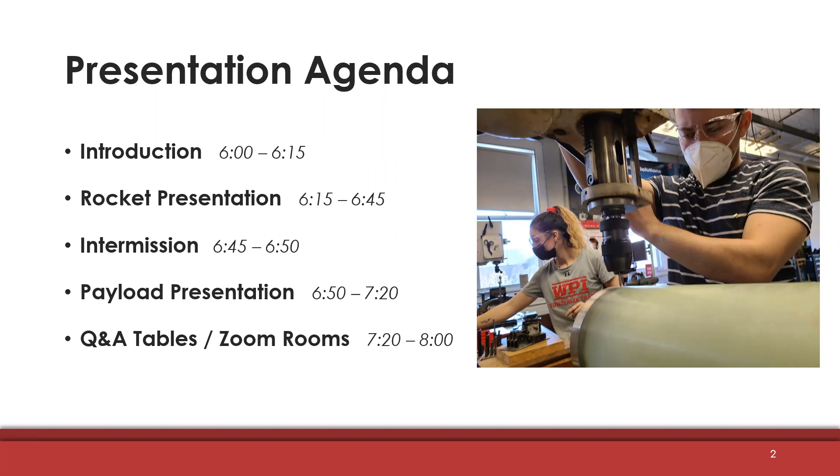Starting off, a little bit about the team overview. So we are a sub-club of the AIAA. We consist of 126 students of all different grades that come together to form two divisions, Rocket and Payload. We'll get more into those a little bit later. The two teams are responsible for different sections of the project, and have 7 sub-teams that make up the two divisions. We'll get more into what each of those are a little later.

We have 16 club officers and sub-team leads. These are the people that manage the logistics, the money, and the safety of the team as a whole throughout the year, and they really make the gears turn for the team as a whole.

A little bit about our team history. We started in 2018, formerly known as the WPI USLI, or University Student Launch Initiative, a competition run by NASA out in Huntsville, Alabama. It had a 5,000 feet target altitude and consisted of about 44 student teams. This competition really focused on technical documentation writing and the design lifecycle, focusing on robotic payloads launched from rockets to solve various challenges each year.

For this year, however, we are part of the Intercollegiate Rocket Engineering Competition, also known as IREC. It's the world's largest intercollegiate rocket competition happening in Spaceport America, New Mexico. In the month of June, we'll head out there with our rocketry advisor, Curtis, and our faculty advisor for that trip, Professor Miller. We'll be launching a rocket over the course of a week and also conversing with many of the other teams there.

Troy. Thank you very much. Go.

Okay, how's it going, everyone? Good evening. My name is Troy Otter, and I'm the Rocket Division Lead for WPI HPRC. As our name suggests, we are responsible for the design and construction of the rocket we will be flying. The Rocket Division is the larger of the two divisions, consisting of about 90 students split among 5 sub-teams.

The mission of the IREC competition is to design and build a rocket that will launch a payload to an altitude of either 10,000 or 30,000 feet and then return to the ground safely. This year, we are participating in the 10K COTS category, which means we will be flying to 10,000 feet using a commercial off-the-shelf solid motor. We are scored based on overall technical prowess of our rocket design and how close we get to our target apogee.

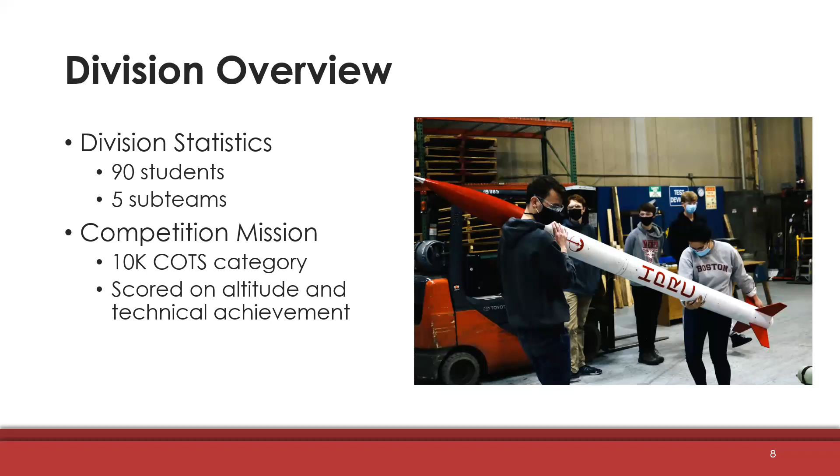I am excited to present the design of our 2022 competition rocket for the Spaceport America Cup. This year's vehicle has a diameter of 6 inches and stands at 11 and a quarter feet tall. Fully loaded on the launch pad, the rocket will weigh 68 pounds, and with a motor producing 500 pounds of thrust, will reach a maximum velocity of over 600 miles an hour.

This vehicle represents a significant step forward in our club's history, integrating multiple advanced new features, including a custom avionics system, a new air brake design, our first large-scale composite components, and a novel recovery system. Tonight, each of our sub-teams are going to take you through the various aspects of their designs, and we're going to begin with the aerostructure sub-team.

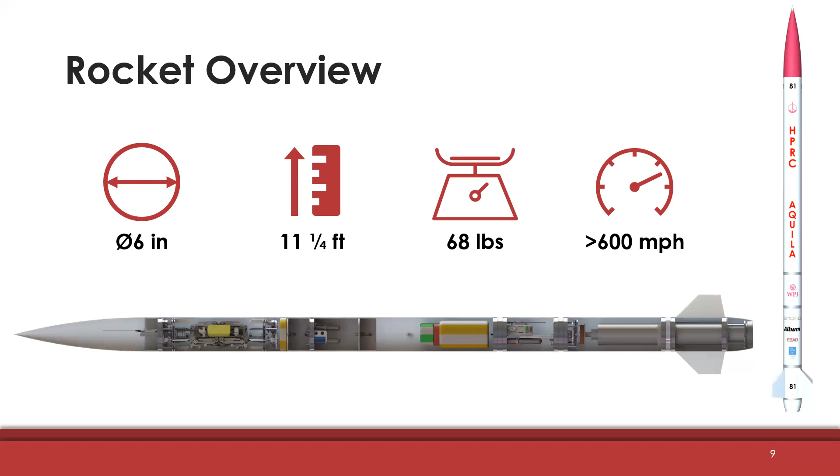Aerostructures is responsible for the outer structure of the rocket. In the picture at the bottom, you can see the different fiberglass sections of the airframe. At the top, we have the nose cone, the upper airframe, middle airframe, the electronics bay, lower airframe, and then at the very bottom, we have our two main components.

Those are the fin can and the tail cone. The fin can helps with stability and keeps the rocket straight during flight. The fins also stay attached to the fin can so that they stay on during flight. The tail cone reduces drag on the bottom of the rocket and also attaches to the motor retention subassembly.

The fin can ensures the fins are straight and thus the rocket is stable in flight. The fin can is also responsible for making sure the fins don't break upon landing. We made it by attaching 4 fins to the body with structural epoxy fillets and ensured its strength with 4 tip-to-tip fiberglass layups, stretching from one end of the fin to the next. We chose fiberglass layups and using a fin jig over fin slots because of its low weight and high strength.

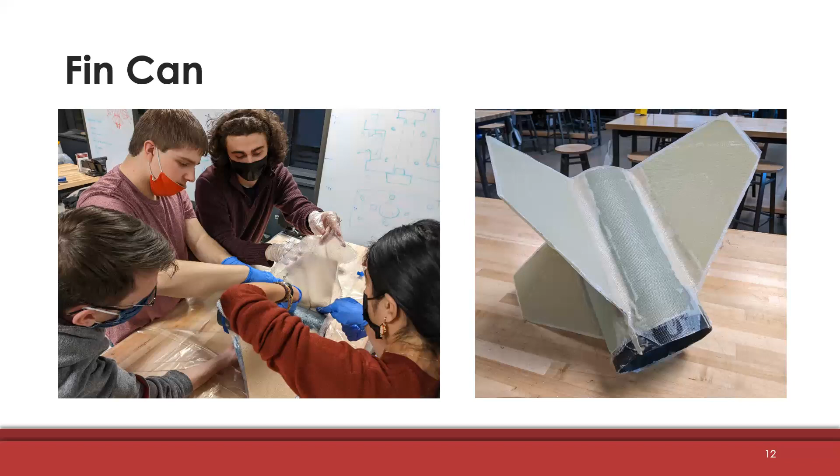The fin can ensures the fins are straight and thus the rocket's stability in flight. The fin can is also responsible for making sure the fins don't move.

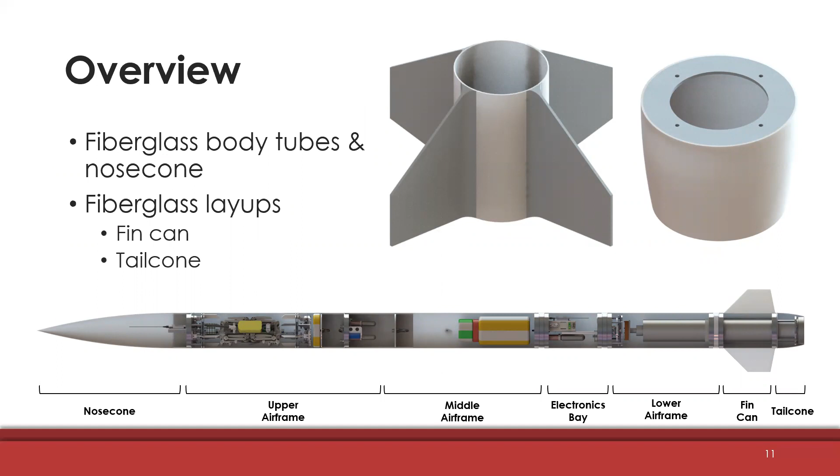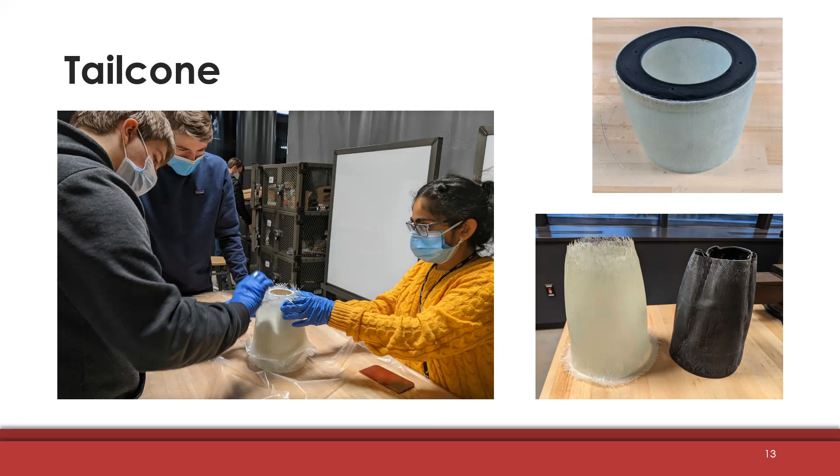The tail cone reduces drag around the end of the rocket and holds the motor casing. We constructed it in 3 steps. First, the mold was 3D printed, which you can see in the bottom right, and the fiberglass sleeves were laid around the mold. In the top right, you can see the final product and the bulkhead, which is used to attach to the motor casing. Similar to the fin can, we made it with strength and weight in mind. Using fiberglass afforded us the low weight, while laying around the mold gave us the strength we desired.

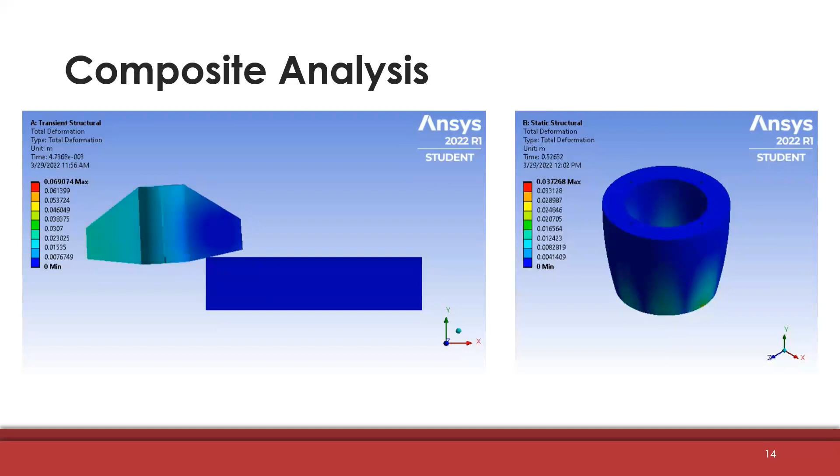To make sure our materials can withstand the forces they face during launch and landing, we ran a series of tests using ANSYS. For the fin can, on the left, we did mostly transient structural analysis, simulating an impact force on the ground, specifically if the fin can were to land on a rock. For the tail cone, we did more static structural analysis, simulating a constant force during landing. In the coming weeks, we plan on doing more physical tests of our composites to make sure the expected results match our simulated results from ANSYS.

And next up, we have couplings.

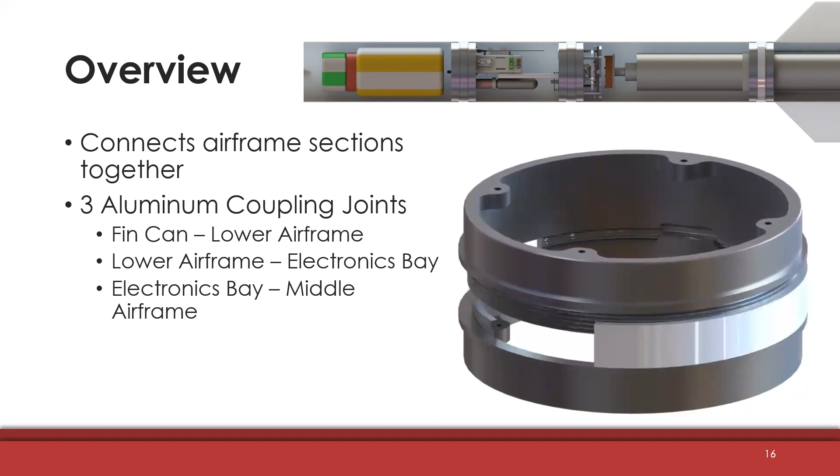The coupling subteam is responsible for rigidly connecting different sections of the rocket airframe together. This year, we decided to connect the fin can and lower airframe, the lower airframe with the electronics bay, and lastly, the electronics bay with the middle airframe. On the right, we have an animation of the couplings assembling and disassembling.

A traditional rocket airframe joint is made up of a short coupler tube that extends into the airframe on either side of the joint and keeps the section stiff. The tube itself and any internal components are held in place with bolts going through the airframe. The downside of this design is that it's difficult to manufacture and assemble, as lining up the small bolts can be a challenge. You also have to include features in your parts for these bolts to thread into, which can increase manufacturing complexity.

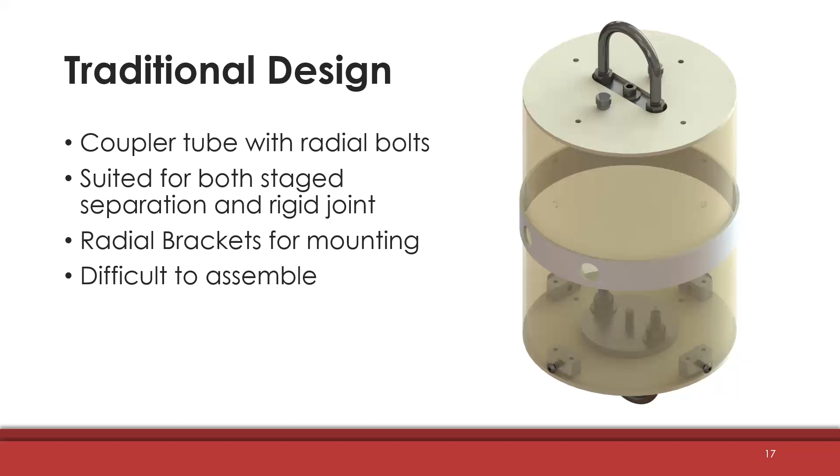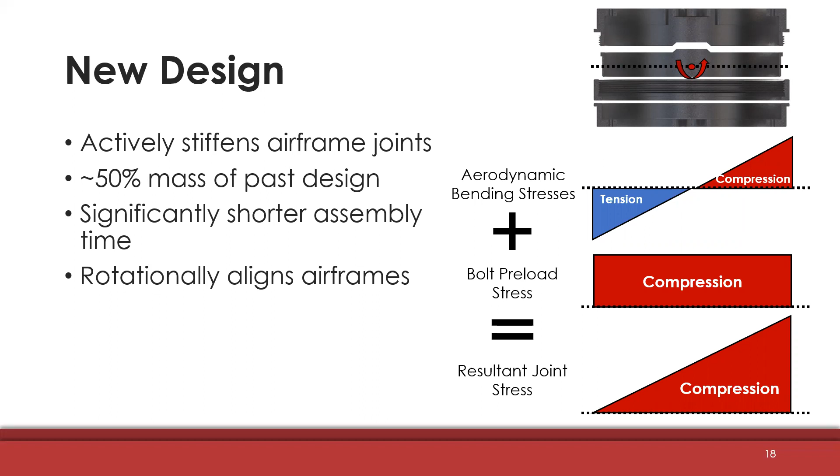Our new coupling design is stiffer, lighter, easier to assemble, and completely standardized across the airframe. The preload derived from our threaded connection helps cancel out the tensile stresses due to lateral loads, so the resultant load on the airframe joints is only compressive. This means the joints are not pulled apart during flight and the vehicle remains stiff. The couplings are also significantly lighter than a coupler tube and take up less space in the airframe. They also feature integrated mounting flanges to make attaching components to them easier than to the coupling tube.

And to verify that our couplings were strong enough, we performed a series of structural simulations in ANSYS to refine our design. Once we had an actual physical prototype, we conducted a real-world flexural test at the worst-case flight loads. These tests allowed us to gain more confidence in the novel design and let us move forward with implementing it into the final rocket.

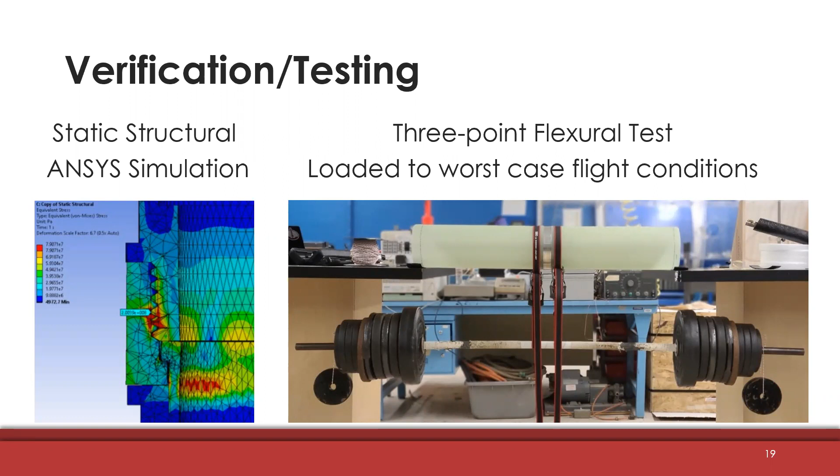Our motor retention system was designed to transfer thrust from the motor to our airframe via thrust coupling and securely hold the motor casing inside the rocket throughout flight. We performed several static simulations on the buckling failure mode of our standoffs and yielding of our thrust coupling.

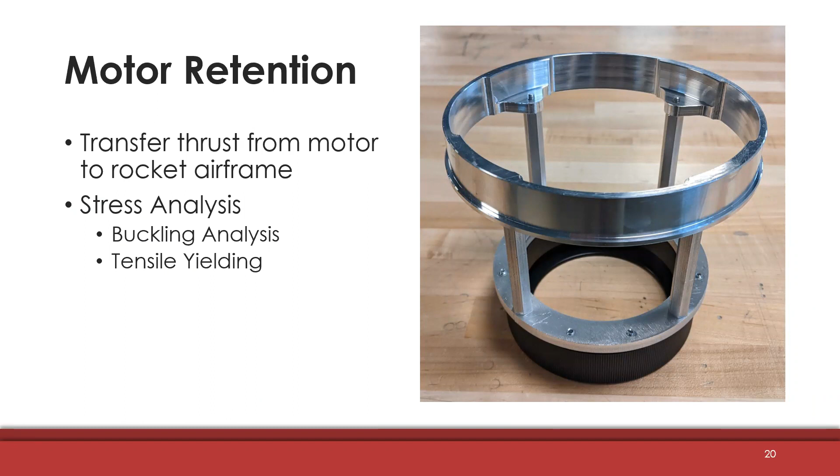Our team spent several weeks in the machine shop manufacturing 3 coupling joints and our motor retention system. Prior to this, we optimized machining processes by cutting threads on smaller test pieces to ensure we get high quality threads on our final product. We also designed several work holding fixtures to allow us to machine our parts more efficiently.

With an overview of the couplings completed, we will now move on to our recovery system.

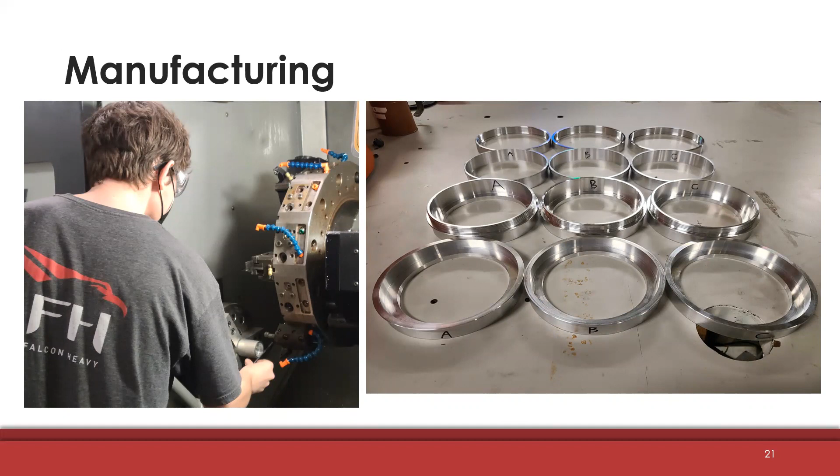The recovery sub-team is responsible for the design of the parachute system used to return the rocket to the ground safely. The vehicle uses 2 parachutes, a drogue parachute deployed at apogee to stabilize the descent of the vehicle, and a main parachute deployed at 1,500 feet above ground, used to slow the vehicle down to a safe velocity for landing. Traditionally, high-power rockets store each of these parachutes in different sections of the vehicle, and the airframe separates in 2 or more locations using black powder charges to release them.

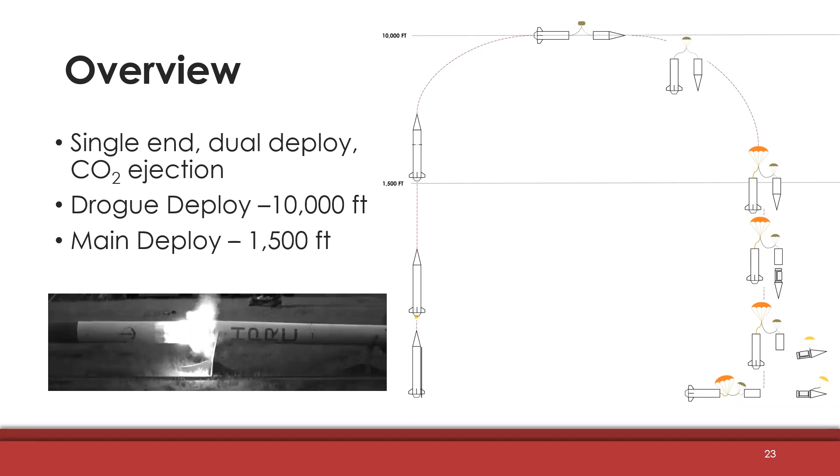This year, the recovery team took on 2 new challenges, the first being that the separation of the airframe is accomplished through the use of a CO2 system rather than the traditional black powder, reducing the need for energetics on the vehicle and the added bonus of reliability that CO2 provides at higher altitudes. Second, the vehicle has 1 separation point, reducing mechanical complexity and the space taken up by the recovery system.

In order to perform these tasks desired for the system, the team had to create a more intricate line system than the traditional. At our first deployment at apogee, the CO2 system will separate the upper and middle airframes. The separation of these airframes pulls the drogue parachute out, while the main parachute is secured inside the middle airframe in a bag by a hair tie.

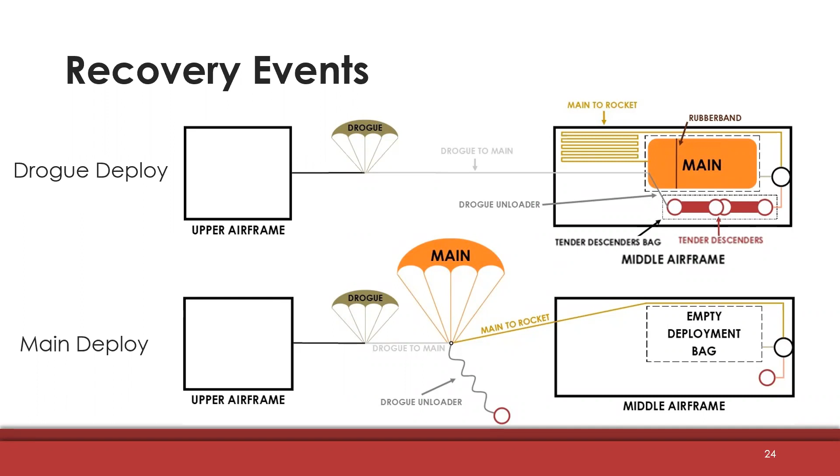At this point, the drogue parachute line pulls on the drogue unloader, which is attached to the vehicle through the redundant tender descenders. Tender descenders are a pyrotechnic release, and at the main deployment, each tender descender has a small black powder charge in it that ignites and separates the connected shock cord. This allows the drogue line to pull the main parachute out of the bag and unfurl to safely land the rocket.

The primary function of the recovery bay is to house the altimeters and the ejection system hardware. Other functions are to serve as an attachment point for our parachutes and to protect the recovery bay from ejection gases. The bulkhead plate is made from aluminum, so it can also withstand the forces of the parachutes pulling on the eye nut coming out the top.

All of our electronics are mounted on what we call a sled. The sled is 3D printed from polycarbonate, so it can withstand the extreme temperatures the rocket faces on the launch pad and at apogee. We decided the shape of the sled should be a half hexagon so we can optimize the amount of surface area we have to mount electronics while still fitting the CO2 ejection system behind it.

We have 2 ejection systems on the rocket. One consists of our primary altimeter and a CO2 ejection system, and the other is the backup altimeter with the same CO2 ejection system. The primary system fires at apogee and then at the second event at 1,500 feet, and the backup system will fire 2 seconds after to ensure the parachutes get out of the rocket.

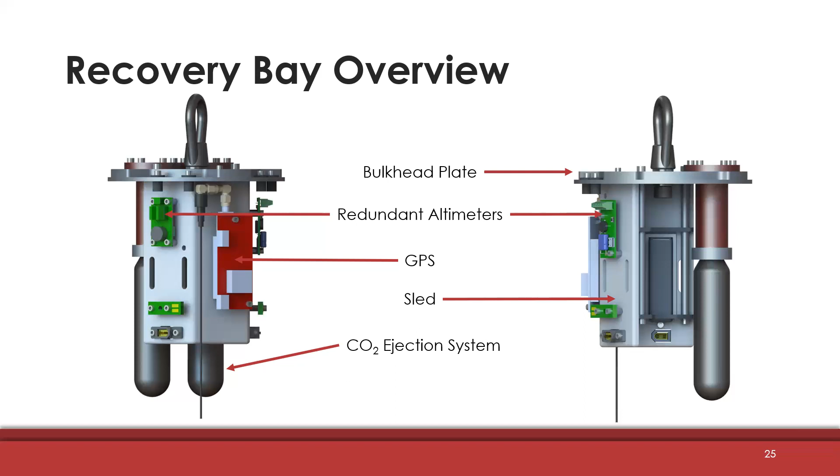In the recovery bay, we were trying to fit everything in as little space as possible. We started making the recovery bay by creating a prototype so we could lay out all the electronics and CO2 ejection systems to make sure it all fits as intended and everything is accessible. From there, the team routed wires to make sure this layout was possible.

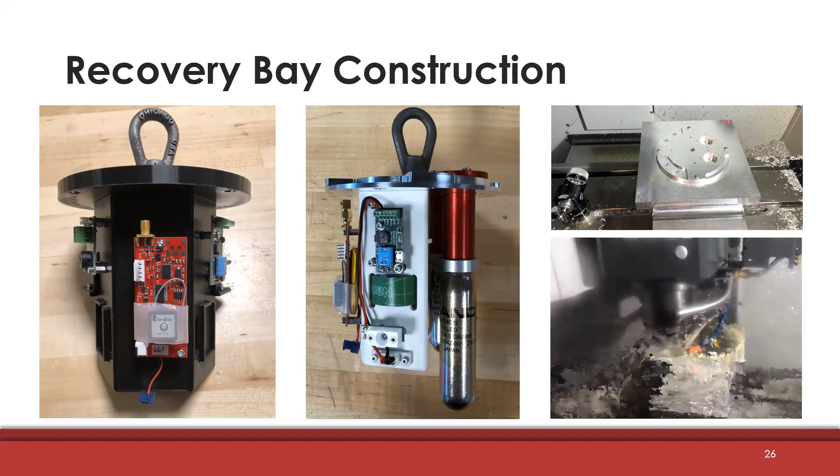After making the appropriate changes, we used a CNC mill to make the bulkhead plate, and the sled was 3D printed. Multiple copies of this plate are being made so team members can learn how to go from CAD to CAM and then machine a final product.

The recovery system is one of the most critical systems on the rocket, so every aspect has to be tested so the rocket lands correctly. Our first test this year was a CO2 ejection test to determine what size CO2 canister is needed to separate the airframe from the nose cone.

We tested several different sizes to determine this. Since this year we're keeping the main in a bag, we needed to see if the drogue has enough drag to pull the main out of the bag. We did this by doing two drop tests. One was tethered to a tree and the other was throwing a test stand off a parking garage to make sure the main parachute will come out of the bag.

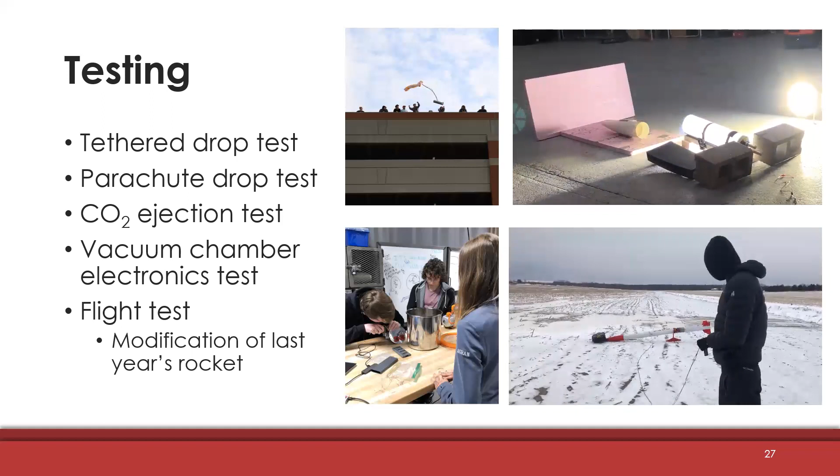To verify our altimeters are working, we use a vacuum chamber to set the pressure to apogee and then main, to make sure the altimeters fire their charges correctly. Lastly, this weekend we plan on flying our new single end deployment system in last year's rocket to make sure it works. And next we'll hear from the air brake sub-team.

The goal of the rocket this year is to reach a target apogee of 10,000 feet. To help us reach that goal, we have implemented a system of air brakes. The air brakes' job is to deploy a set of fins that help increase the amount of drag that the rocket feels, and as a result will slow down the rocket enough to help us reach the target apogee.

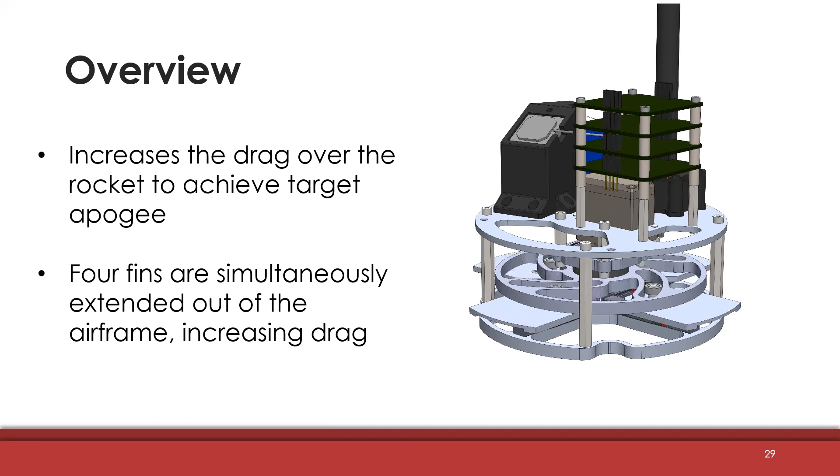In our initial design, we wanted to limit the amount of friction and binding that the air brakes would feel. So some initial designs we looked into were a rack and pinion, and even fins that would deploy by rotating in the outer airframe of the rocket. However, we ultimately decided to go with a linear rail system, as it provided the most stability and was more consistent than the other models.

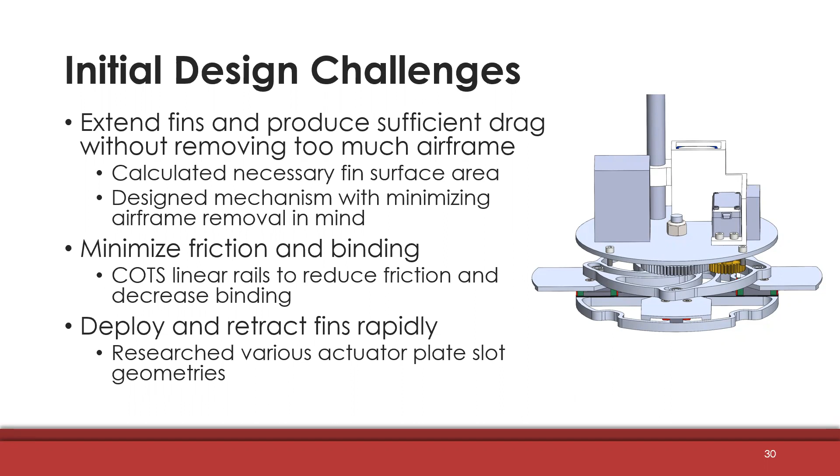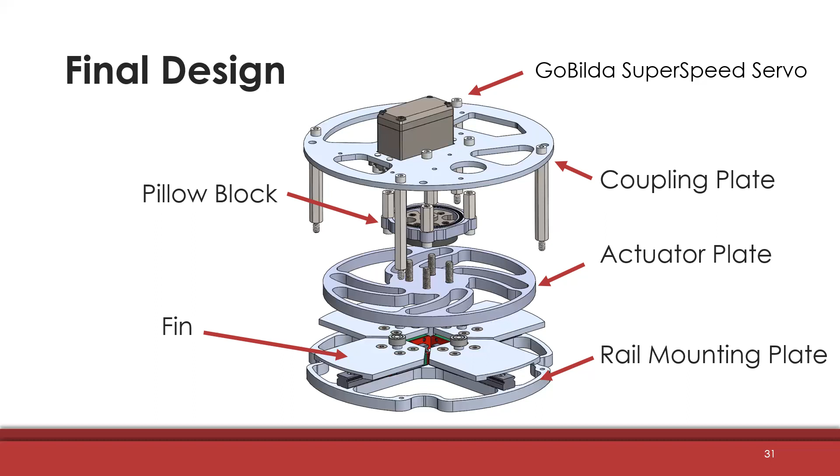Next step in our process was to verify our designs. To verify that the air brakes would be capable of effectively controlling the apogee of the vehicle, we began simulating a normal flight using OpenRocket, an open source software. From this trajectory, we selected a series of points representative of the full range of dynamic pressures the rocket would experience during flight.

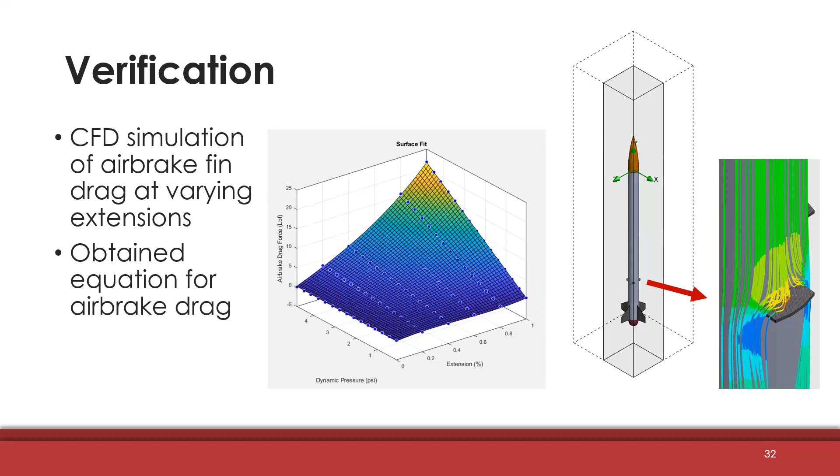With this data in mind, we then moved on to prototyping. The creation of the prototype was essential to confirming that our design would work the way we intended, and that the air brakes would properly deploy as they're critical to reaching that 10,000 foot apogee.

From our prototype, we were able to verify that the linear rails would provide reliable actuation with low friction and that we would be able to avoid binding. The prototype also proved that the fins were moving with each other at the same time. This was important to reduce the risk of aerodynamic moments causing the trajectory of the rocket to fluctuate and destabilize. Lastly, this test proved that the air brakes were structurally sound and restricted any unintentional motion in the system.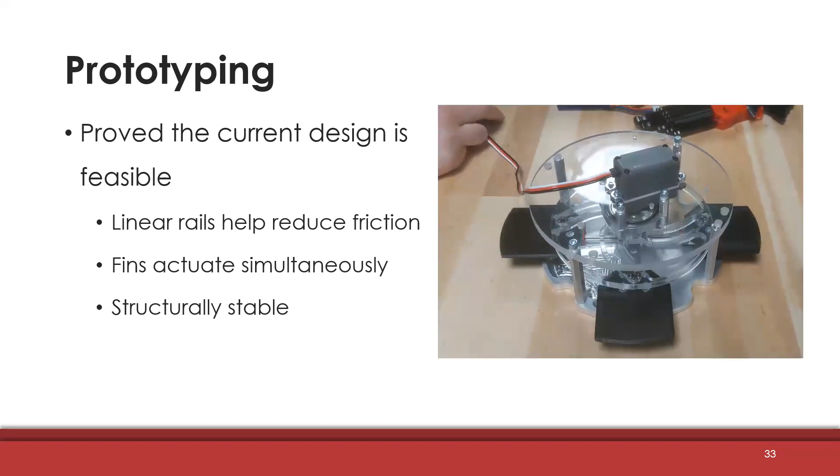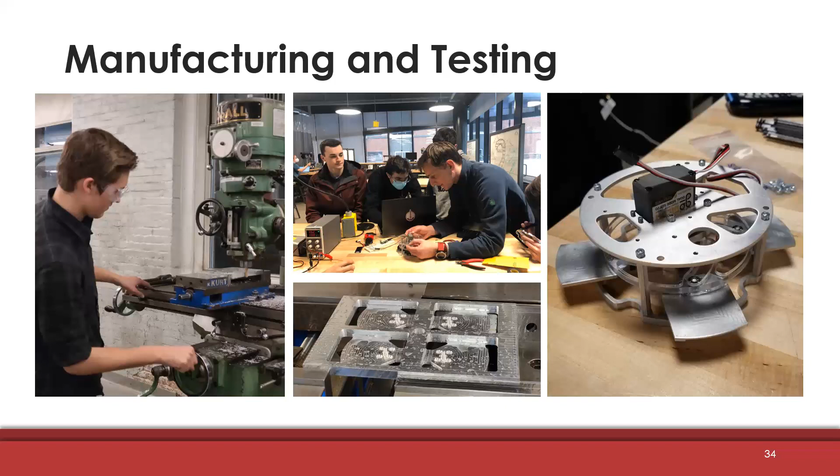After having proved our air brakes design through prototyping, we moved on to manufacturing. During this last C term, our sub-team began manufacturing in the shops here at Washburn. Most of the components were machined in-house by our students out of aluminum. Most of the operations were completed on CNC mills, ensuring the parts were made accurately and within our tolerances, making them suitable for our purpose.

Hello, I'm Cameron, interim payload lead for HPRC. This year's payload will deploy a quadcopter drone to complete its mission of autonomously locating the rocket using a directional antenna tuned to the frequency of the rocket's telemetry transmission. The payload will be deployed from the rocket once it's falling under parachute, and will deploy a quadcopter once safely reaching the ground.

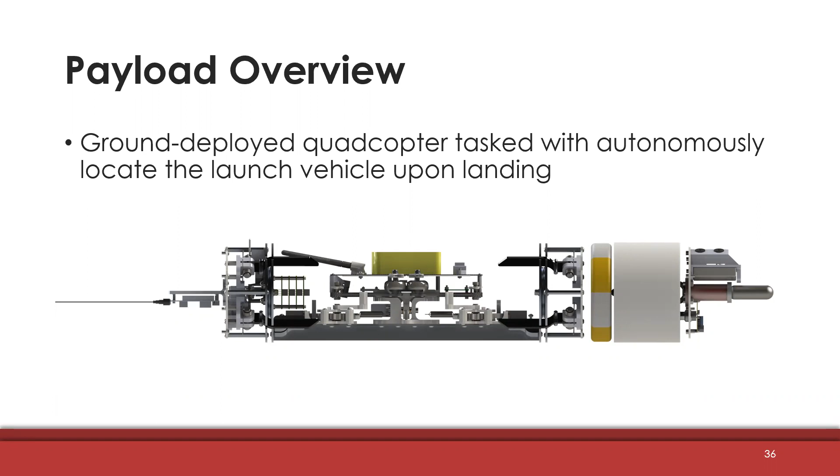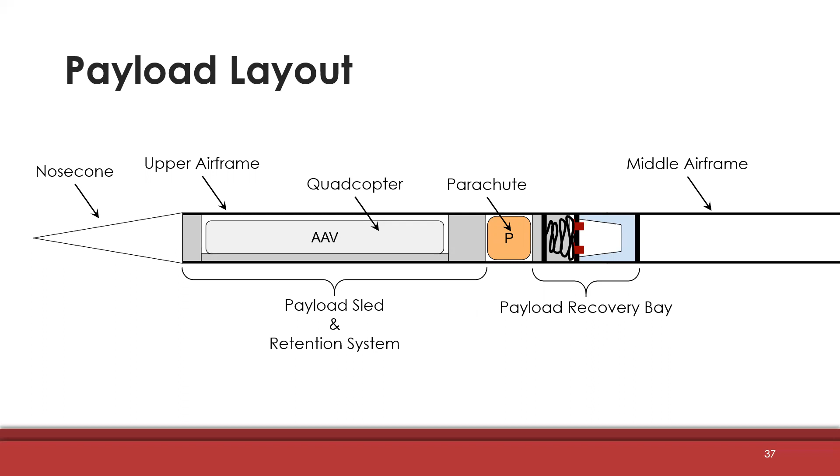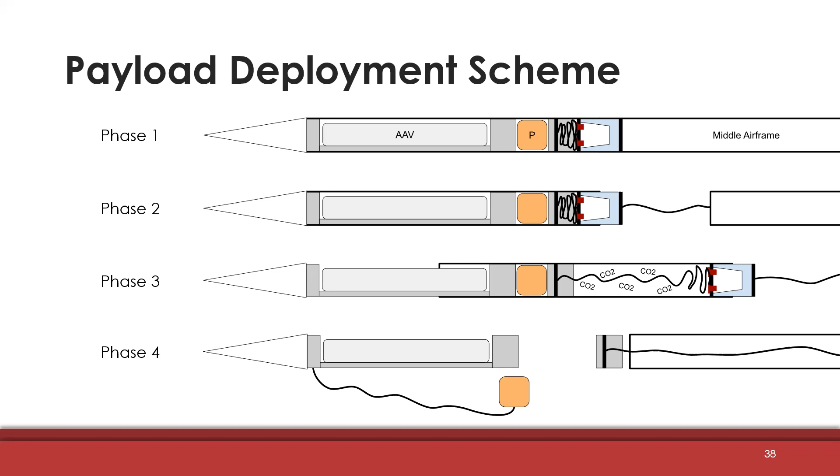So this is the deployment scheme of the payload. After the rocket splits and the upper airframe is ejected from the rocket, as seen in phase 2, at around 1,400 feet the payload's CO2 system is activated, pushing the payload out. This is just after the main parachute deploys on the rocket. When the payload CO2 system is activated, it pushes the payload out of the upper airframe, allowing the payload to deploy and allowing the payload's parachute to open up and descend.

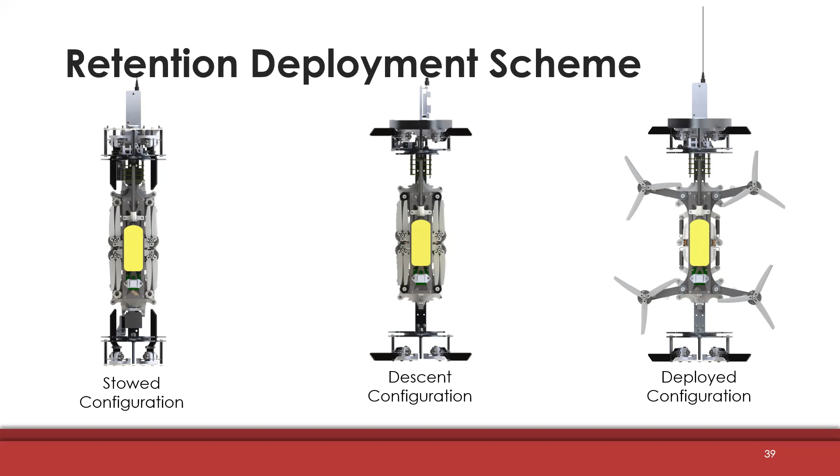Next, we have our payload mechanical division.

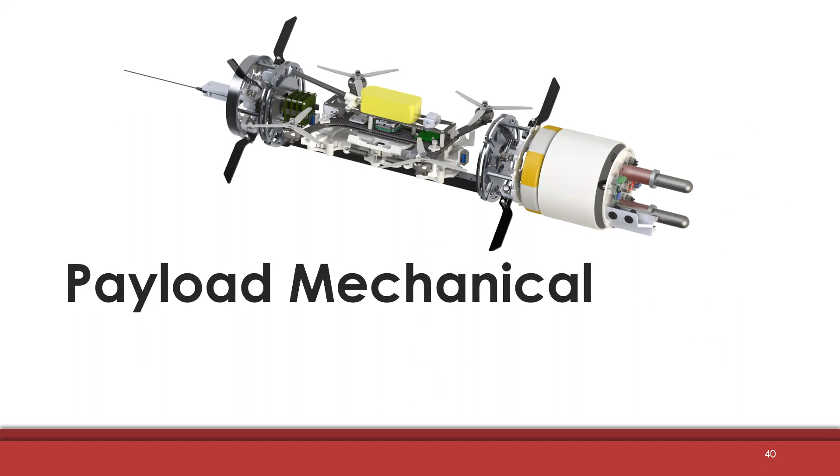Hello, this is the mechanical portion of the payload, and there are two major systems: the retention system and the quadcopter. First, the retention system. The payload's retention system is responsible for retaining the quadcopter from ascent to landing, providing a stable platform for the quadcopter, along with deploying its arms and releasing it for flight.

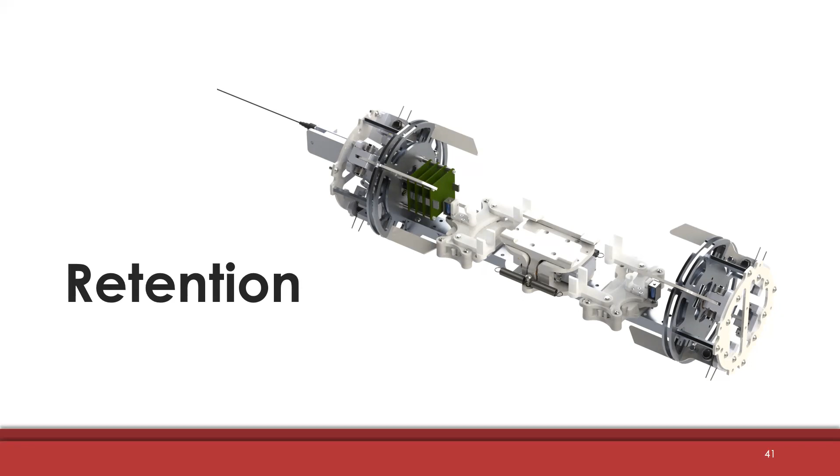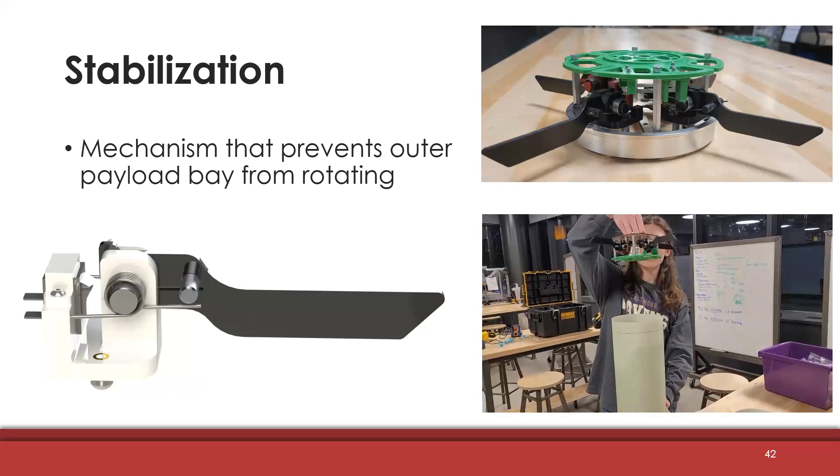The first part of the retention system is the stabilization system. These stabilization pedals deploy when the payload comes out of the upper airframe, and it prevents the payload's bay from rotating mid-flight. They are deployed using spring power, and as you can see in the video, they come out very well.

The second part of the retention system is the aforementioned rotation part. This mechanism is used to ensure proper deployment of the quadcopter, the sled, and the interior of the payload, and must be rotated once we're on the ground so that the quadcopter is parallel to the ground. To do this, we designed a mechanism powered by a servo that rotates the sled, as shown in the diagram. We have a rotating bulkhead with a thrust bearing in between to reduce friction and make it slide as smoothly as possible. A shaft passes through these two bulkheads and is bolted on either side to make sure there's no slip in the thrust bearing, and there's a D shaft on the rotating bulkhead so that it can actually rotate.

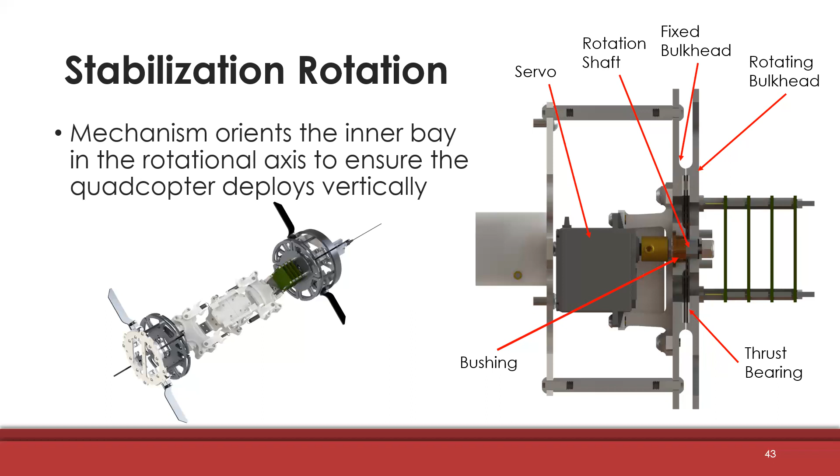And next is the parachute release mechanism. Once we're on the ground, we don't really want the payload running away from us in high winds. So we have to cut the payload,

cut the parachute. To do this, we're using a servo that has a spring counteracting it. The spring is used to ensure that if the servo loses power at any point, the pin stays closed and our payload does not drop from the sky. We used a SolidWorks simulation to make sure that this pin and the pin mounting mechanism has enough strength to

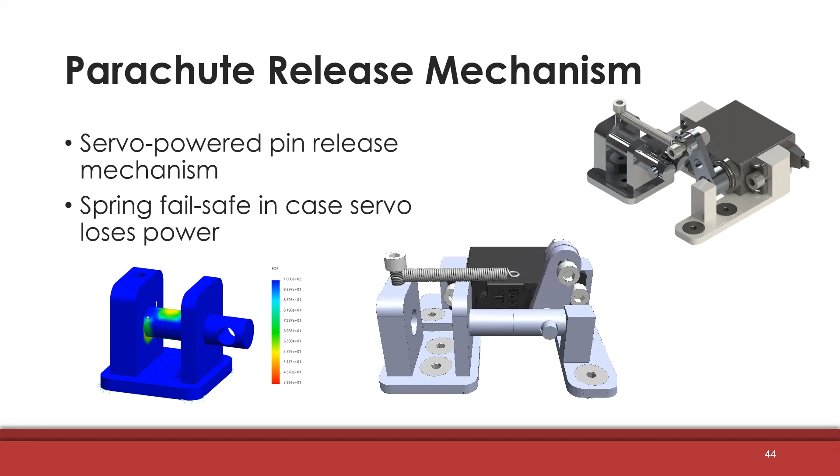keep it from failing under opening load. Once we get to the ground, we're self-righted and we've released the parachute, we have to start deploying the quadcopter. The first step of this is the quad deployment, the arm deployments.

We're using a rack and pinion held back by a servo. We're using a rack and pinion because it was an elegant way to keep a low profile and reduce weight. The system is locked with a servo, as you can see in the back, and when we are in visual confirmation and visual sight of the quad, we let the servo know that it's all right to open up, and springs pull the middle rack forward, releasing the arms of the quadcopter, as you'll see later

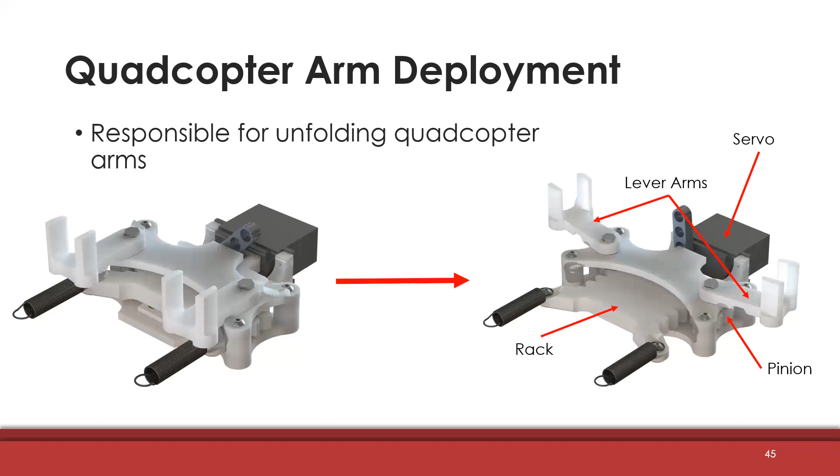on. The last part, and arguably the most important part of the retention system, is a quadcopter gripper. This quadcopter gripper holds around the quadcopter the whole duration of the flight. And it uses 4 gears powered by a servo, and it drives the arms outward and inward with gears.

Once visual confirmation is made from the payload and the arms are unfolded correctly, we let go of the quadcopter for the quadcopter to finish the mission.

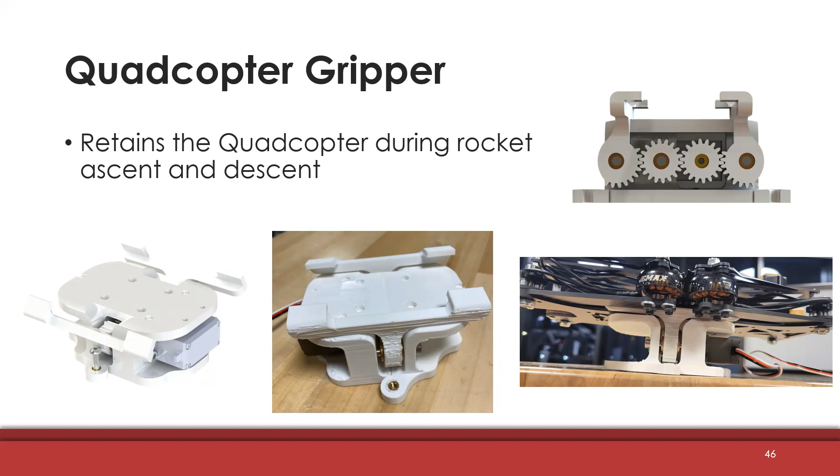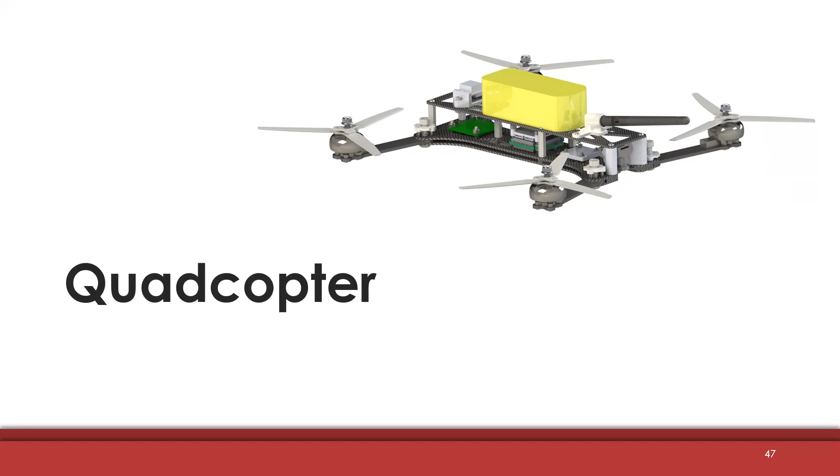All right. So on to the quadcopter. The quadcopter is a portion of the payload that is responsible for autonomously locating the launch vehicle upon landing. So moving into the structure for the quadcopter, in order to ensure a quadcopter can complete this mission in the largest range of possible wind conditions, we designed an unfolding quadcopter with a large overall frame and propeller size, which also takes up less space and room inside of the rocket when stowed.

This design features an H-frame with arms that fold alongside the body and unfold and lock into place once we reach that configuration. The main body of our quadcopter is constructed from a sandwich of carbon fiber plates to provide strength and rigidity to the frame.

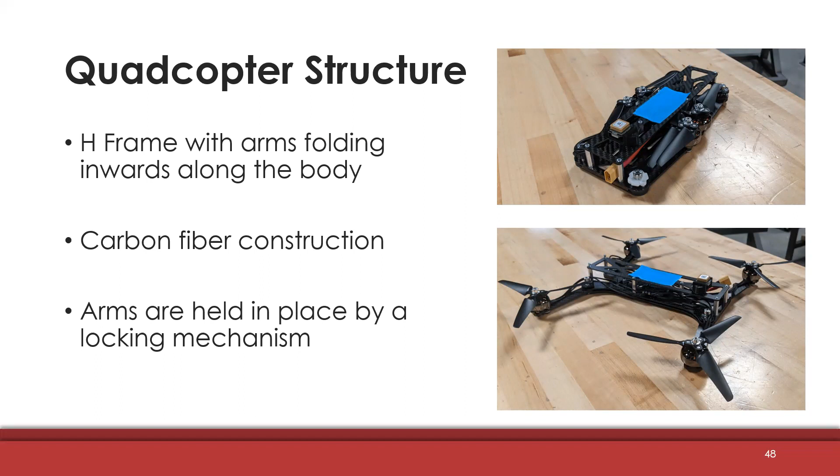We also designed a quadcopter arm locking mechanism. To ensure our quadcopter's arms are positively locked into place once unfolded, a spring-actuated pin locking mechanism was designed. This design is a result of iteration on a previous year's design. A shoulder bolt is used as the main structure and motion guide to ensure smooth and precise actuation.

Once the arms are unfolded, a spring pushes a 3D printed pin carrier, which has 3 machined aluminum pins, into place. These pins locate into holes in the quadcopter's frame, as well as the quadcopter arms, which prevent them from rotating during flight.

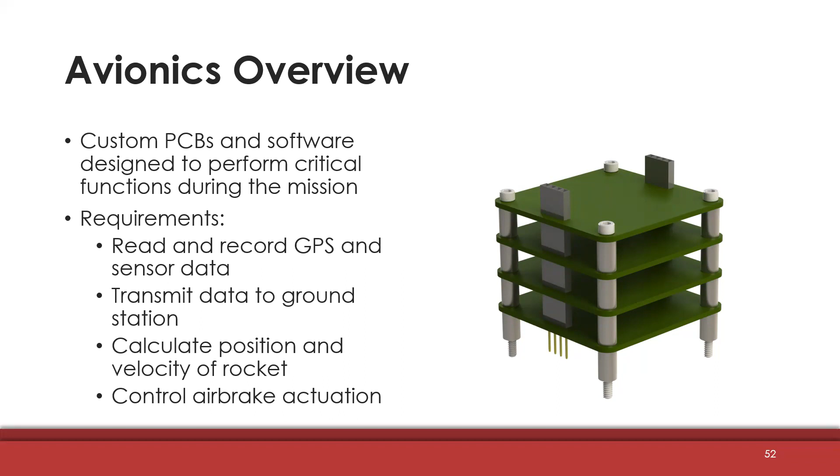Okay, so moving on to the avionics system of the rocket. The avionics system consists of 4 custom designed PCBs, as well as software to perform critical missions during our flight. Our main requirements were to read and record GPS and sensor data, transmit that data to the ground station, calculate the position and velocity of the rocket, and control the air brake actuation to reach our target apogee.

The avionics system is comprised of 4 separate PCBs that are arranged in a stack. We have the controller board, which houses our main processor and handles calculations for the control of the air brakes. The sensor board houses a number of sensors for gathering data on the rocket's position.

The telemetry board records the sensor data as well as transmitting it to the ground station. And finally, the power board is tasked with regulating the battery voltage to be used by the other boards. And it also controls the servo and separation charges.

All these PCBs were created using Altium Designer, and the system is designed to be modular, so you can easily swap out boards if there's a problem, and it was an easy way to divide up the design work.

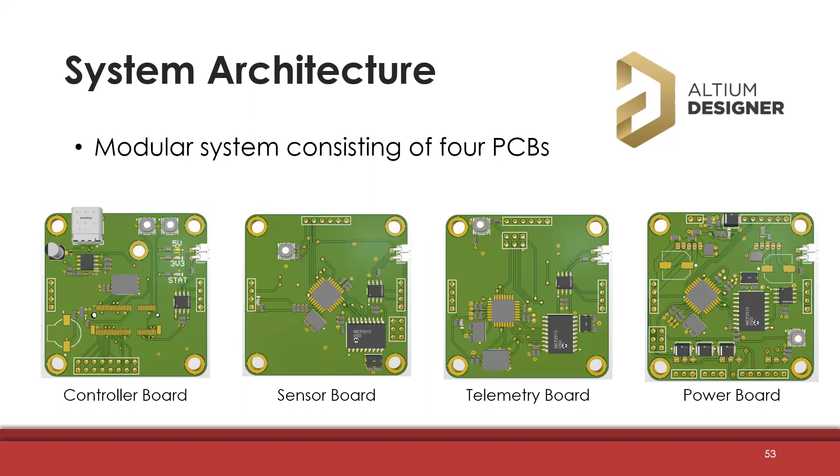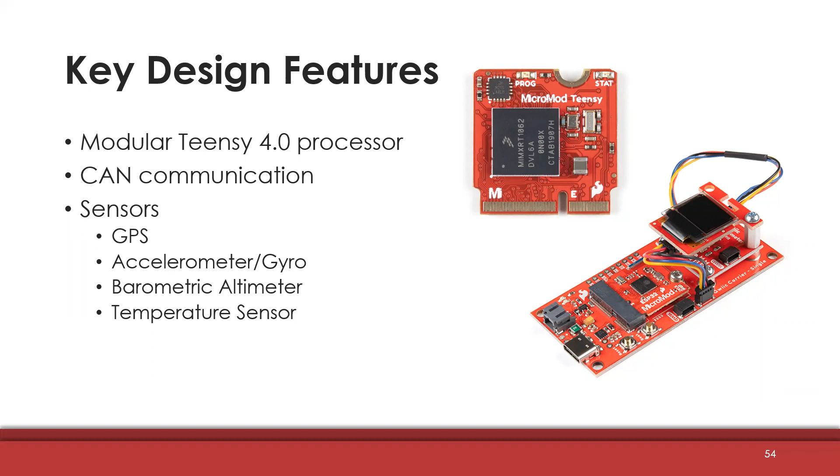Some key features of our design include the usage of a Teensy microcontroller, which functions similar to an Arduino, but is much more powerful than a standard Arduino. The boards are connected with CAN communication protocol, which is resistant to noise and enables us to connect as many boards as we need. The main sensors we are using include a GPS, an accelerometer, an altimeter, and a temperature sensor.

Moving on to the ground station. The main purpose of the ground station is to allow the team to be in the loop with exactly what's happening with the rocket as it progresses through its flight. To achieve this, we have written custom software to receive and display the telemetry coming from the rocket. The radio receiving the data will be connected to a Raspberry Pi microcomputer, which will host its own Wi-Fi network, so the computers running the ground station software can connect and pull data from the rocket.

The ground station team has also been simulating, developing, analyzing, and testing custom antennas suited specifically for long-range and high-altitude communications. On the left is a receiving antenna we designed, tuned, and simulated using MATLAB, proving effective at our target frequency of 915 megahertz, as seen in the graph of magnitude versus frequency. The higher the magnitude of the gain at a given frequency, the better it is at that frequency.

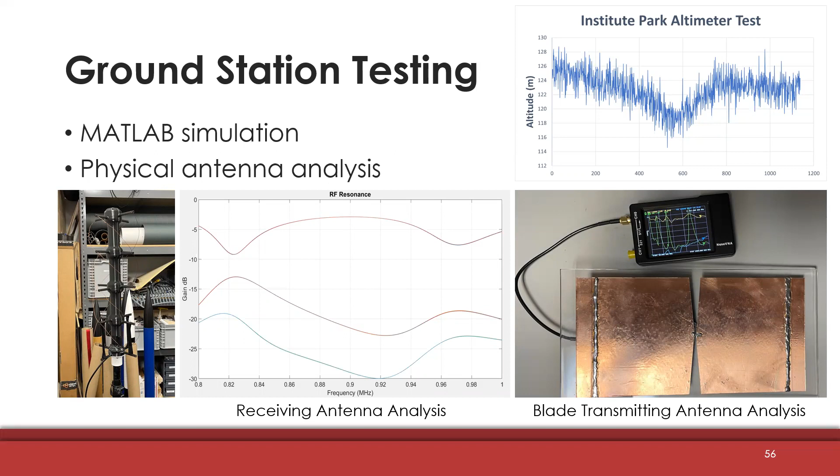In the Institute Park altimeter test plot, you can see the results of a test we performed across the street in Institute Park, transmitting to the ground station from 580 meters away as we walked up and down a hill, which was logged by the ground station and later analyzed and put into this plot.

Here is the most recent version of the ground station with its full functionality. All relevant information pertaining to the rocket during ascent, descent, and after touchdown can be viewed here and logged to a file on the user's desktop or wherever they specify.

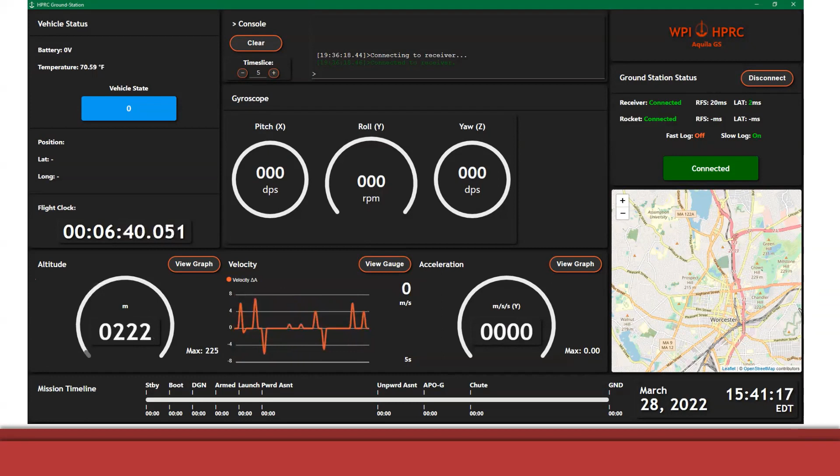What you can see here is a video of the ground station during a test transmission with only the barometer hooked up to the transmitter, which is feeding us temperature and altitude. The graphs update live as telemetry is transmitted from the rocket, with a delay from rocket to ground station of approximately 2 milliseconds, with slight variations depending on the range of the rocket.

All right, so I'll be going over the electronics and programming for our payload. The payload is split into two main sections that Keelan and Thierry discussed earlier, which are the retention and the quad. As you can see, retention is on the left and the quad is on the right.

For the retention software, the system first starts in the passive state, which represents when the rocket is in flight, including during descent, until landing is detected by the accelerometer. After detecting landing and getting a go-ahead signal from the team, the retention system begins deployment mode, where the quadcopter is oriented to release upwards.

The quad arms unfold, and lastly we do a pre-flight check, which includes checking communications with the ground station, most importantly making sure that we're receiving the proper sensor data from the drone in order to accurately perform our payload mission. After everything looks good to go, the quadcopter is released from the retention and flies off.

To execute the mission of finding the rocket, the quadcopter takes radio signal readings, which it receives through a radio and antenna on the quadcopter, and it measures the strength of this in order to determine which direction the rocket is in. The quadcopter will take initial readings in different positions, and based on those will approximate a direction to fly in. Then, as the quad is flying, it will take more data to continuously recalculate the approximate location of the rocket.

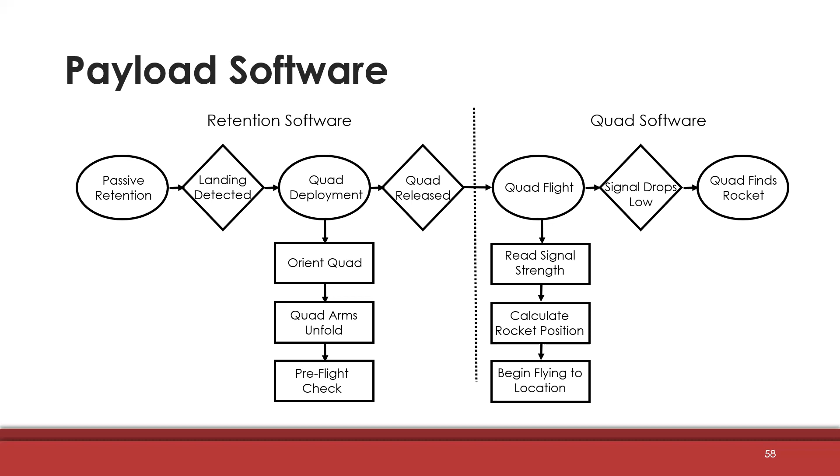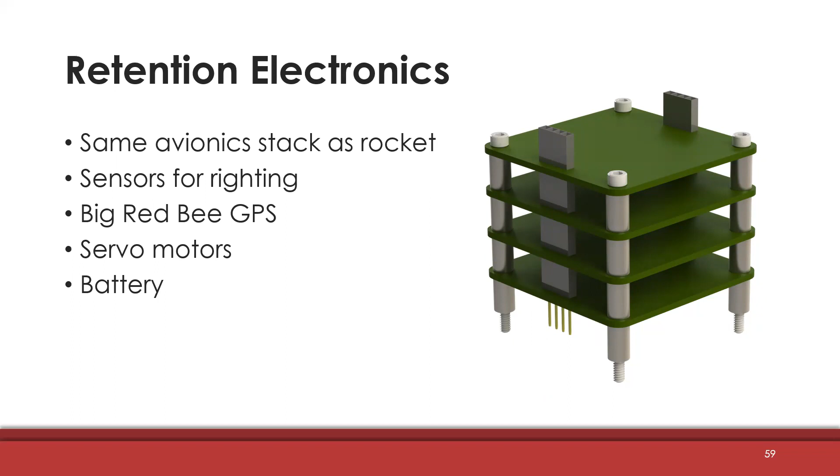For the retention electronics, we chose to use the same avionics stack used for the rocket. This stack includes the sensors necessary to orient the quad at the beginning of the quad deployment mode, using specifically a gyroscope and an accelerometer, along with the necessary interfaces for the servos to retain and release the quadcopter. Per competition rules, a Big Red Bee GPS will also be included in the system to track the retention bay's position during descent and after landing.

And lastly, for the quadcopter's electronics, we have the Lux H7 flight controller, which we chose mainly based on cost, size, availability, and ability to interface with other necessary electronics. The rest of our system includes a camera, a GPS module, motors, ESC, battery, and a custom PCB, which will include a microcontroller to process the signal strength from the antenna and the LoRa radio, in order to calculate the adjusted heading of the quad.